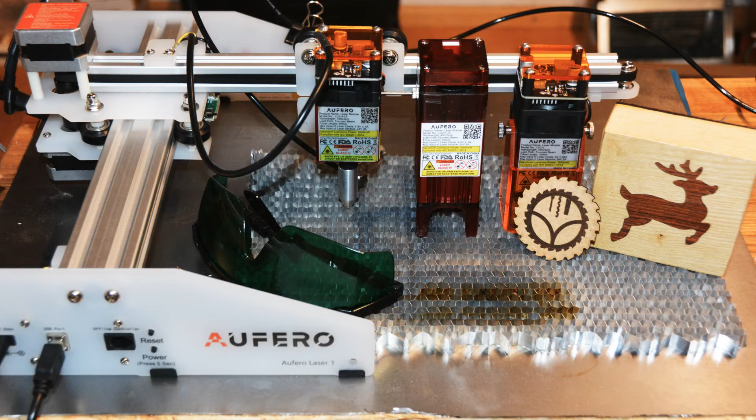Today I will review the Aufero Laser Cutter from Ortur. When Ortur asked for a review of the Aufero that I'm unpacking here, it caught my interest, as in contrast to many other laser devices, it can not only engrave, but it can cut many different materials.

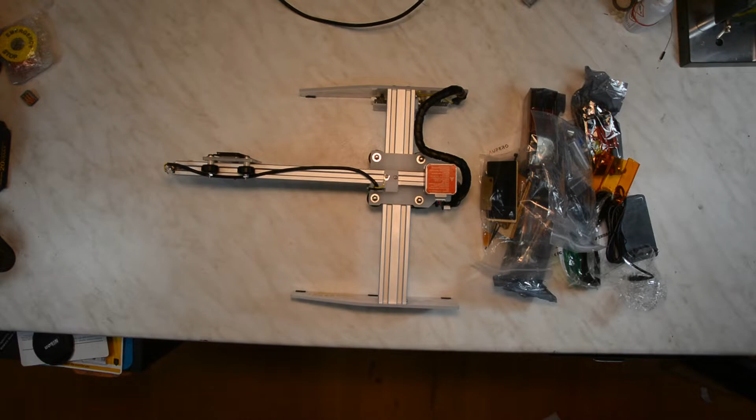Overall, the possibilities are much closer to a 40-watt CO2 laser like the K40, but the laser is portable and quite lightweight. The laser comes pre-assembled and nicely packaged. It is modular and can be used with 3 different modules. Before we talk about the 3 different modules, let's talk about the software side first.

I love the fact that the Aufero is using an open source solution called GRBL as a controller. As this firmware is quite popular, there are a lot of different software alternatives available. Ortur recommends Lightburn as a commercial software and LaserGRBL as a free alternative.

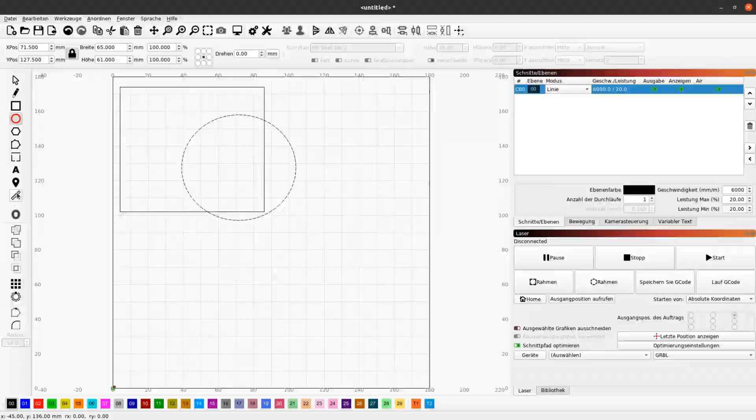I tested the laser with Lightburn, but I don't want to pay their license fee. LaserGRBL looks quite nice, but I was not able to get it up and running on Linux. The solution I would recommend is LaserWeb. It is an open source software that is very well designed and runs on Windows, Mac, Linux, and even on the Raspberry Pi. It comes with quite a few features that make it a very powerful tool.

For Windows there is an installer, for Linux you just download the app image. LaserWeb comes with a safety feature that it will only send data to a known firmware. As the Aufero does not send the firmware identifier after the connect, we need to reset the laser when it connects. Just create a file that is called .env and paste the string reset_on_connect=1 into that file. After restarting LaserWeb, it should recognize the laser running GRBL 1.1.

When running the software for the first time, we need to adjust some settings. Under Settings, we start from a generic GRBL machine. In the machine section, we adjust the width and height of the working area to 180 by 180, which is the maximum size the Aufero can handle. The other necessary changes we are going to make in the G-code section. Just copy and paste the settings you see on the screen from the written website article.

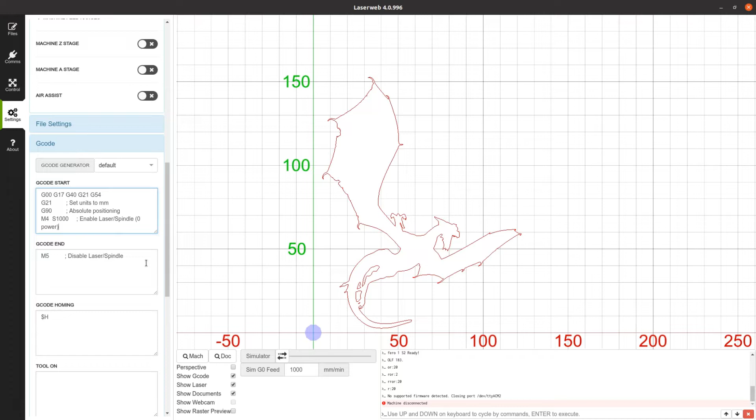LaserWeb offers a lot of other features, like using a numpad or gamepad for moving the laser head, adding a camera feed, and many more to explore. These might be worth another video. Now let's add a file and start cutting something.

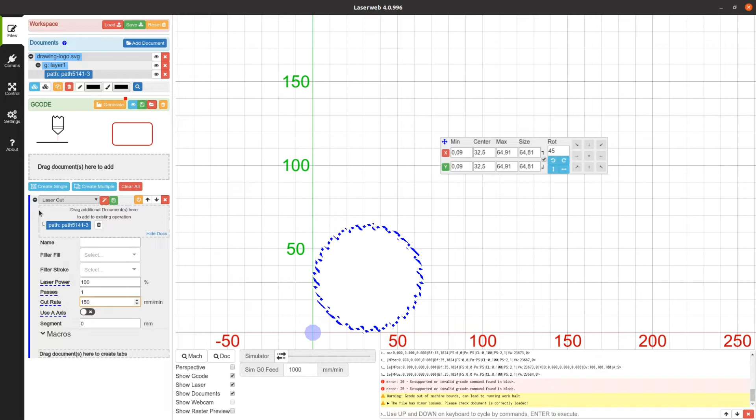In the file section of LaserWeb you can add raster and vector images in the upper part. You then drag the document in the lower section to create an operation like cutting or engraving. While this might seem to be double work at first, it is actually quite handy, as you can select different parts of a vector image to be cut with different parameters. For now, let's just set the speed and we are done.

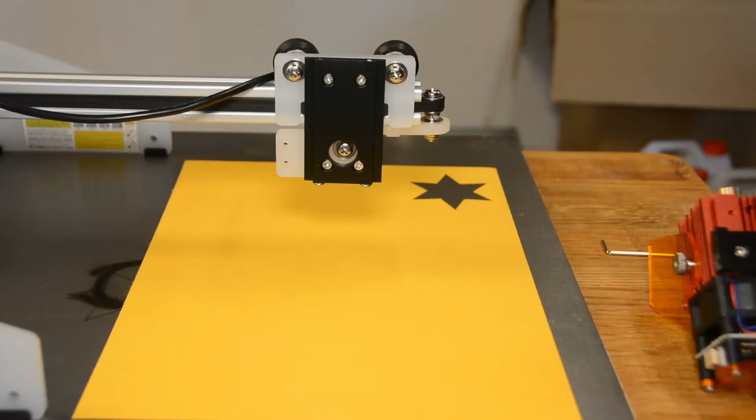In the control panel, we can home the laser, let it indicate the area we are going to work on, and then hit run and let it cut the piece. As we got the software out of the way, let's focus on the laser itself. I got 3 different modules to check.

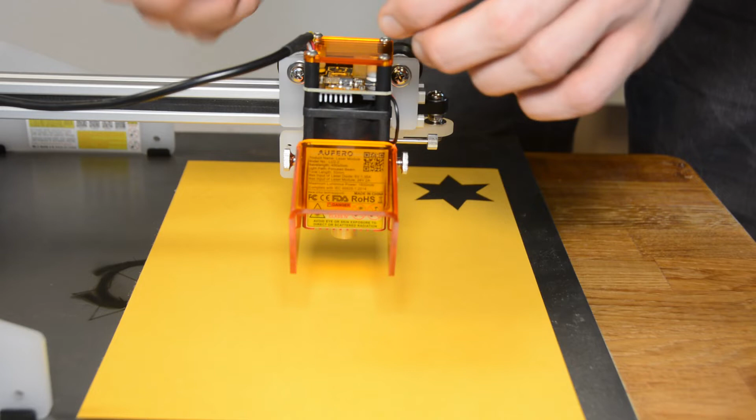This is the LU2-2 with a power of 1 to 1.6 watt. The assembly is just to connect ground and a small plug and we are ready to go. The laser comes with an aluminium cylinder that you can place under the module to adjust the focus. The primary purpose of this module is engraving.

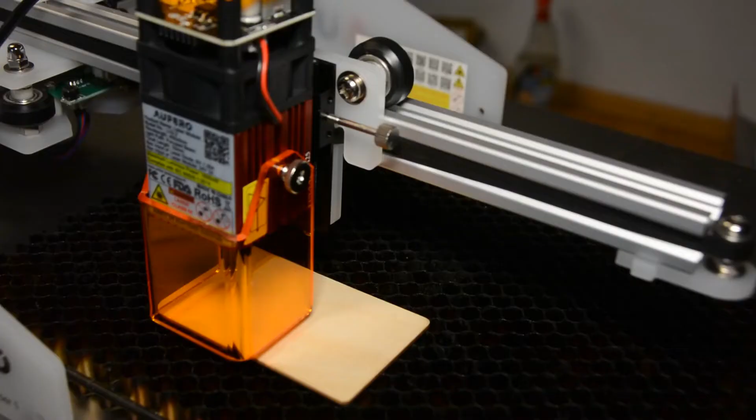You can engrave very nice and dark pictures in wood, and it will also work on painted metal, leather and other materials. Besides engraving, it is also able to cut paper and cardstock.

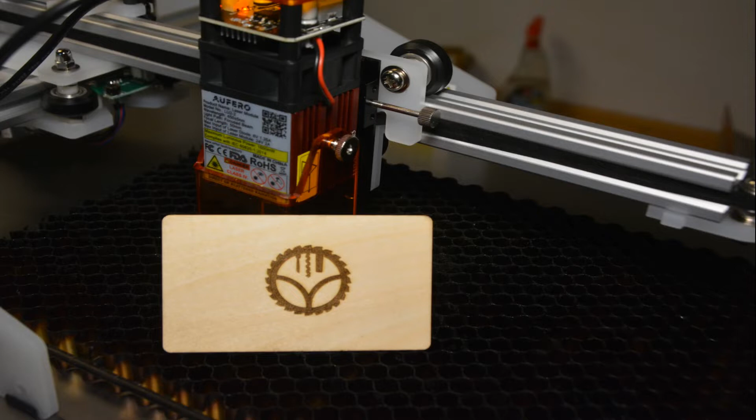The laser comes with an Excel file that helps you find the right setting for each material. This is very nice, as when I first got the K40 laser, I had to try and experiment a lot to find the right settings.

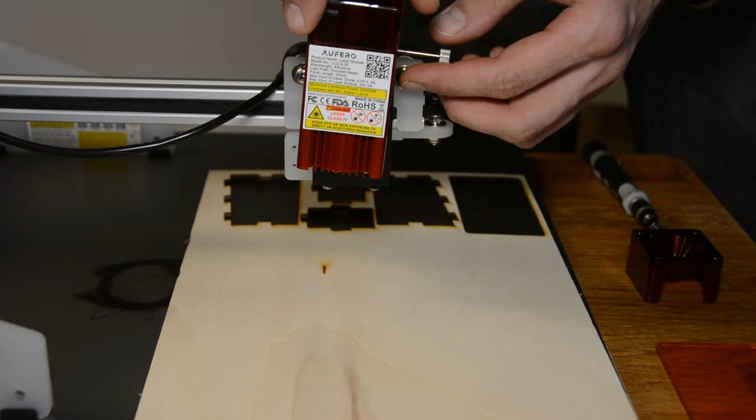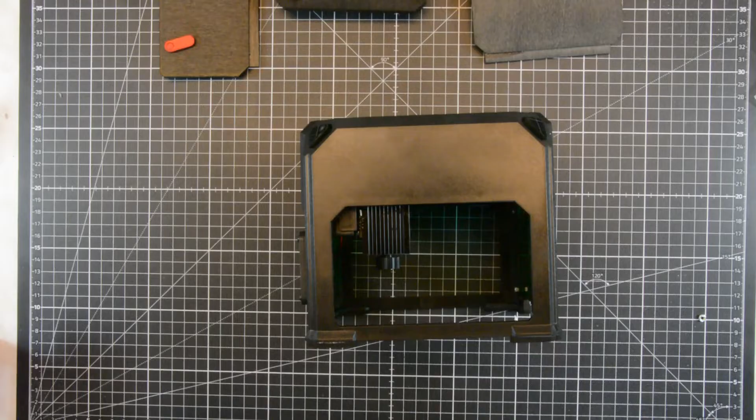You should go with this module if you mainly want to engrave and cut some paper and maybe fabrics or leather. If you want to cut thicker wood, then the LU2-4SF is worth a closer look. This module can be attached to the same base with fastening one screw and fixing the ground wire.

Before making things with the laser, it is worth to have a look at the security. In the past, I have built enclosures for laser engravers where the beam could easily bounce off from the surface. This cover that is held in place with magnets seems reasonably safe to me. But even with the enclosure, you should always wear safety glasses.

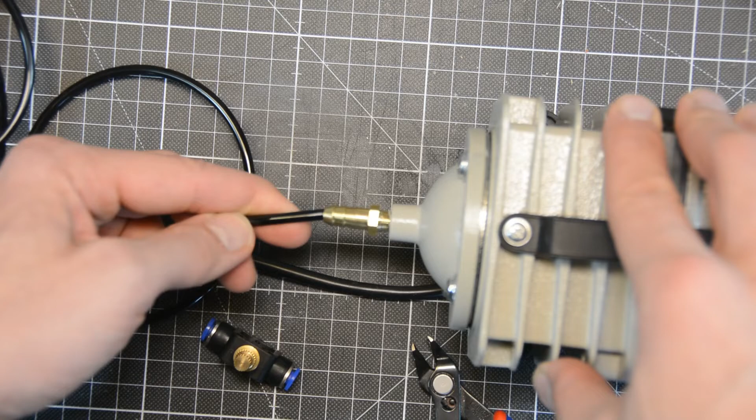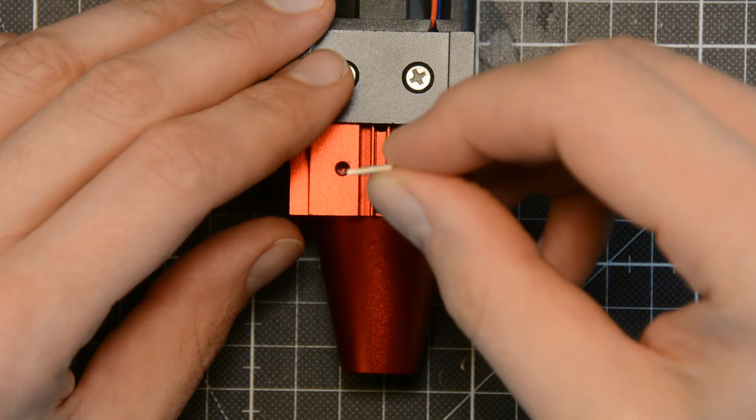Cutting MDF with 150 mm per minute, which is a bit slower than a CO2 laser, works actually quite fine. Also here, the engraving is very dark, sharp and detailed.

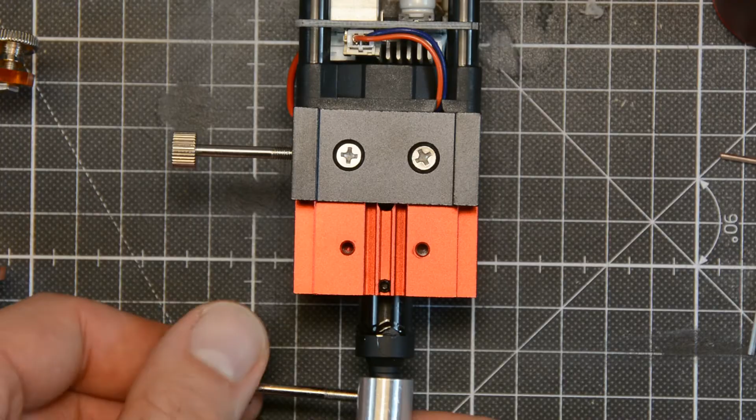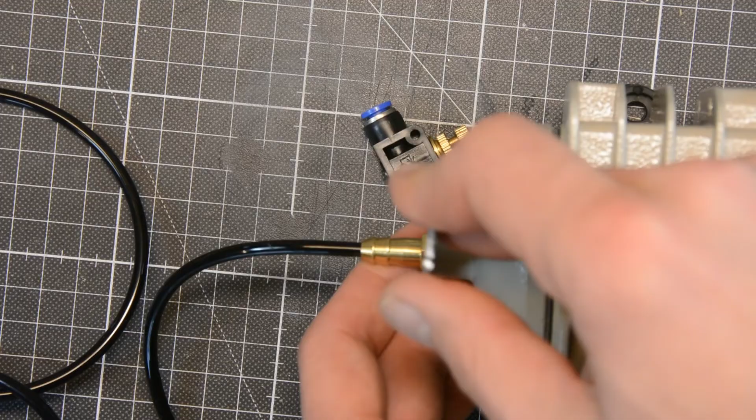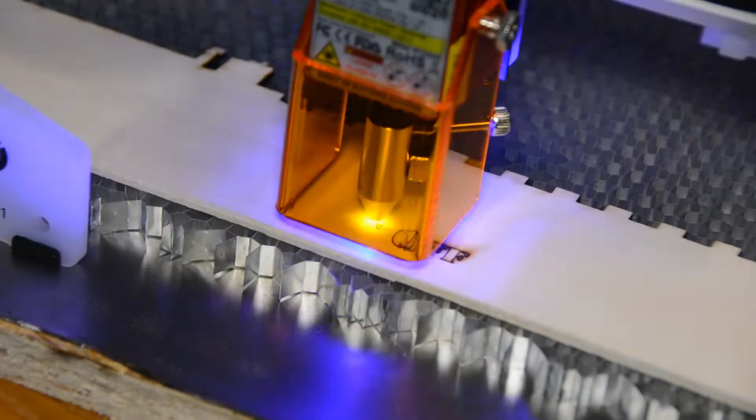When cutting material directly on a piece of steel, you get ugly burn marks on the underside of your piece. It is therefore advisable to get a simple bed. You can get an aluminium honeycomb structure for around 15 to 20 bucks at eBay. Besides MDF, we can also cut 4mm plywood.

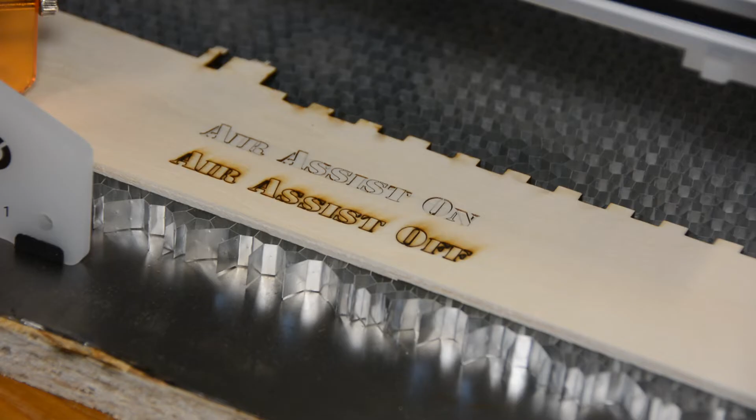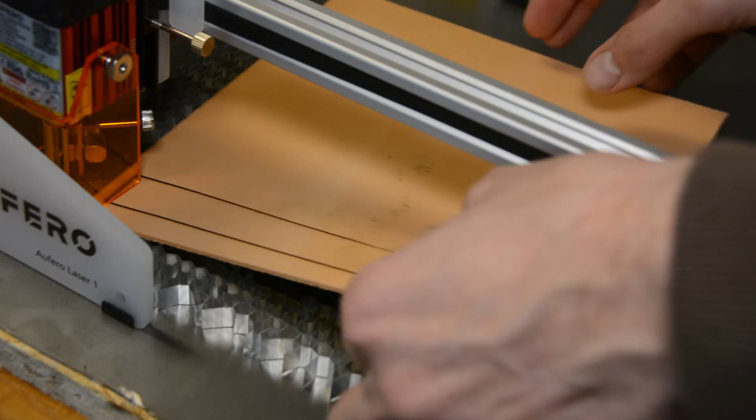Cutting only test pieces quickly gets boring, so let's make a small box. The boxes.py box generator is awesome for a quick box design. We just select the size of the box and get a shape that is ready to be cut. In LaserWeb, we select the blue outlines to be cut as the first job by applying the stroke filter. In a second operation, we cut the pieces free. With a little bit of glue, we have a small box with a lid.

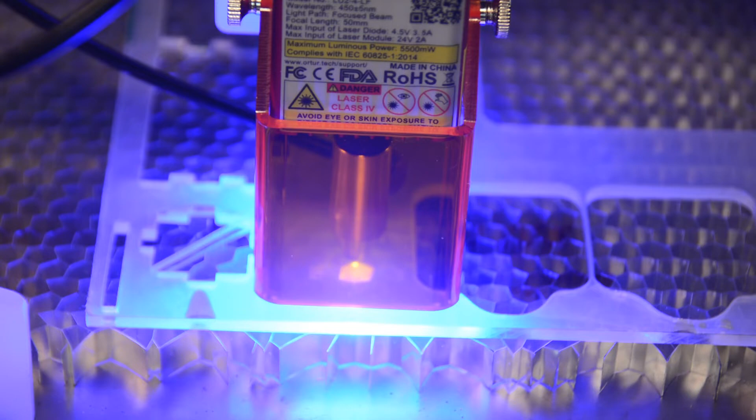The next thing we want to cut is some wood veneer. As Christmas is approaching quickly, let's cut a reindeer from the oak background and a matching inlay from darker wood. The small diameter of the laser beam is a big advantage when cutting pieces that should fit together. They neatly friction fit in one another, although I have cut both with the same shape. For the K40 laser cutter, I always had to compensate for the width of the laser beam. This makes inlay work so much easier.

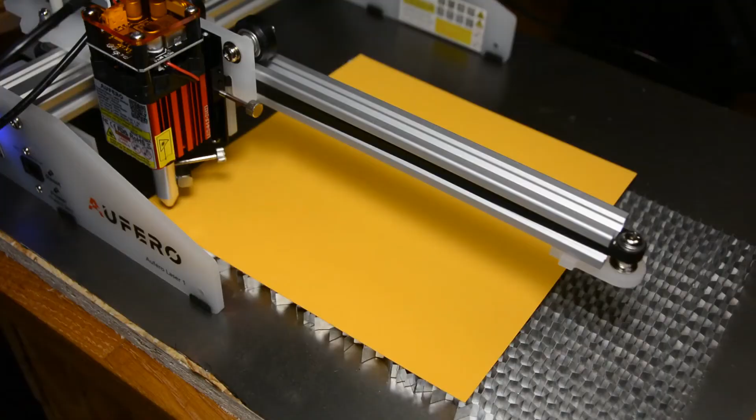To finish the project, we glue more veneer to the sides. One coat of hard wax oil and we are done with the box.

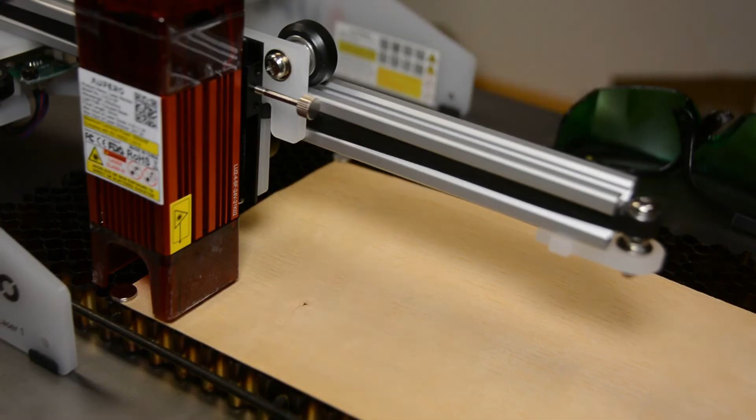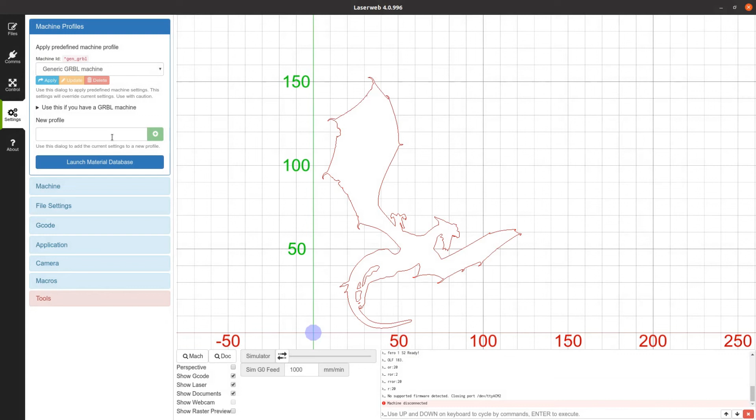Let's now look at the third module, the LU2-4LF. As the previous module, it comes with a power of 4.5 to 5.5 watt and is able to cut even a bit faster through most materials. The focus length for this module is set in the same way as for the LU2-2 with the 50mm metal cylinder. It is able to cut all the materials that the LU2-4SF can cut. Let's start with an engraving on a slate coaster. The classic Picasso camel engraves nice and deeply.

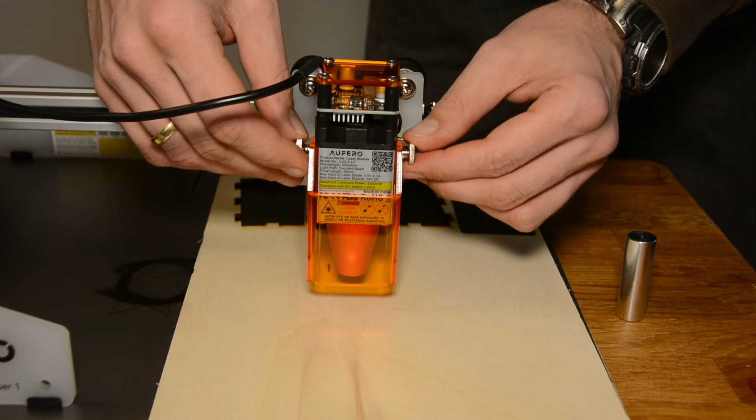For cutting, we can attach an air assist to this laser module. It comes with all the hoses and connectors. You only need a small aquarium pump in order to get the air assist running.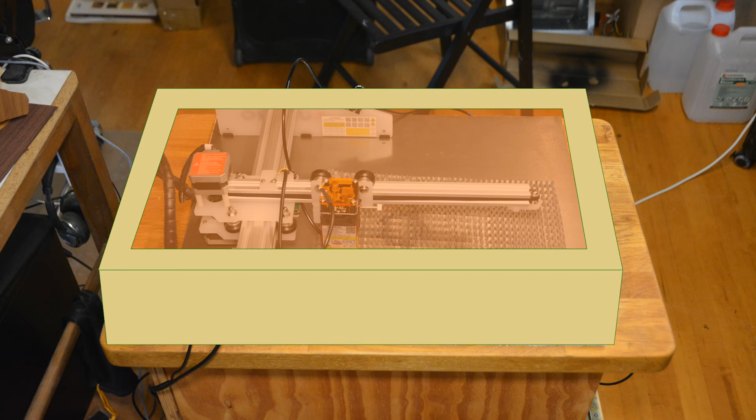Get the headless screw in the back of the laser loose and unscrew the cone. The cap on the side is removed so that we can slide it over the inlet. Then secure the hose with the cap. Attach the air assist to the laser and secure it with a long screw. The connector on the pump is not ideal, but with a bit of hot glue, the hose fits actually quite well. The air pressure of the pump is not going to be high, so the connection should be good enough.

The hose is connected with the air regulator, and another piece of hose is connected to the small pump that I bought on Amazon. Let's cut a simple shape with the air assist turned off and another one with the air assist turned on. You can clearly see that the cut is much cleaner with the air assist. Also, if you are planning to cut thicker material in multiple passes, an air assist helps to remove the burnt material from the cut and allows you to cut deeper.

For another project, I need a piece of leather, which the laser cuts without any problems. Also, cutting colored acrylic is fast and easy. The laser is, due to its wavelength, not able to cut clear acrylic. With some painter's tape, it is possible to engrave clear acrylic on the surface, but even when coloring the surface or covering it with black paper, I was not able to get a good cut.